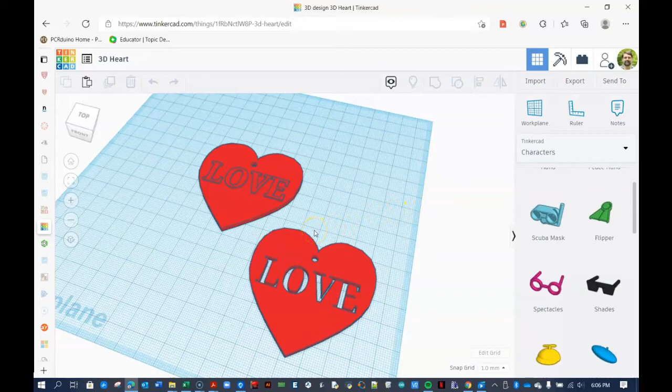While there are other more powerful 3D modeling programs out there, the 3D design features in Tinkercad are so simple and easy to learn that it is a good starting point for many students. Sometimes easier is better than powerful, especially when having a basic prototype in hand is more important than taking the time to learn how to use a more complex CAD program such as Onshape, SketchUp, or SolidWorks.

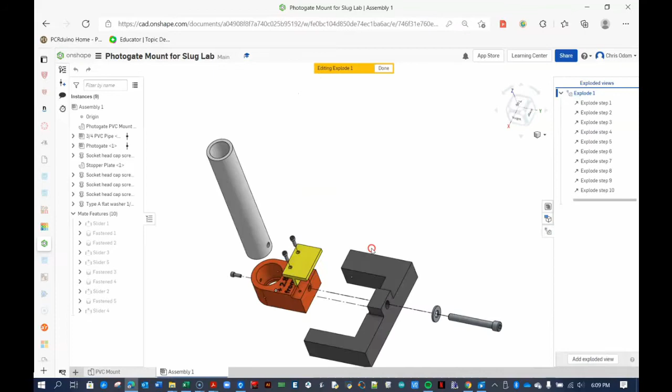Before jumping into how to use Tinkercad, let's take a closer look at exactly what we want to make. For most engineering tasks, you will have a very clear set of design parameters and tolerances. But our artistic ornament allows us more flexibility to be creative here. Nevertheless, it is prudent to have some idea of the dimensions of your design before starting out.

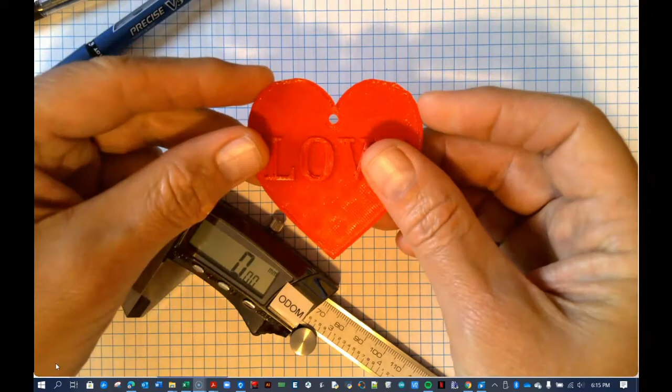Furthermore, let's add a hole that is just the right size for a small screw. In our robotics lab, we often use size 4 screws for our robots, so let's make the hole for this type of screw. Specifically, we use 4-40 screws. The number 4 tells us something about the diameter of the shaft. A number 4 screw, for example, is larger than a 3 and smaller than a 5. And the number 40 tells us that there are 40 threads per inch.

However, because the hot plastic extruded from the 3D printer comes out a little thick, I'll make the hole just a bit larger than the table suggests. From trial and error experience, I know to make the hole 3.66 millimeters. We are now ready to begin to design our ornament. Okay, so let's get going.

The first thing you want to do is create a Tinkercad account if you haven't done so. It's free for educators and for students, so hop on there and create your account. Then when you get to your home page, you'll see a link for 3D designs or circuits or whatever, and you're going to click on 3D designs and create a new design here.

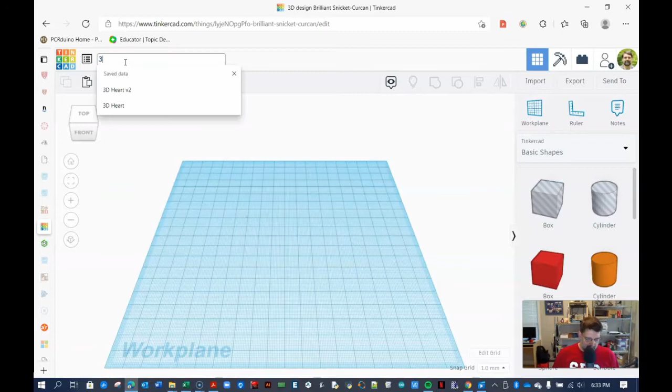It's going to be named something silly like this. We're going to change that name. I'm going to call mine 3D Heart version 2. Okay, and it automatically saves, which is nice, and it saves to the cloud, which is nice, but if you don't have the internet, then you are out of luck. So, pros and cons, right?

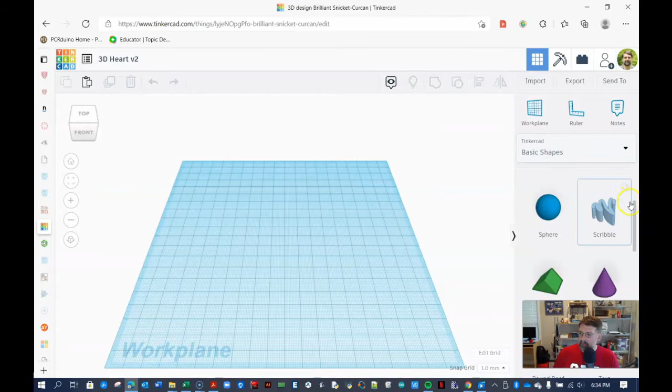So the first thing we want to do is realize that this is our work plane, and we can build anything we want on here. And because we're building a heart, I'm in basic shapes, and I'm scrolling down to the heart, and I'm just going to drag it onto the work plane there.

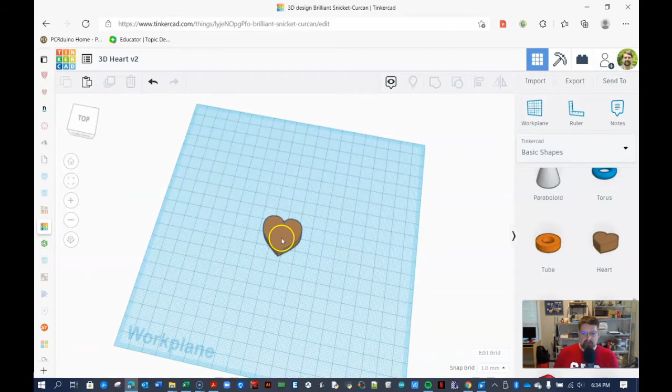Okay, I can reorient my view by turning this little cube. I can also right mouse click and move around like so. And here's a nifty trick. There is no hand tool. So for example, if I move this heart down here and I want to zoom in on it, if I zoom, no matter where I put my mouse, it doesn't have a focused zoom. So it's kind of difficult to get down to there.

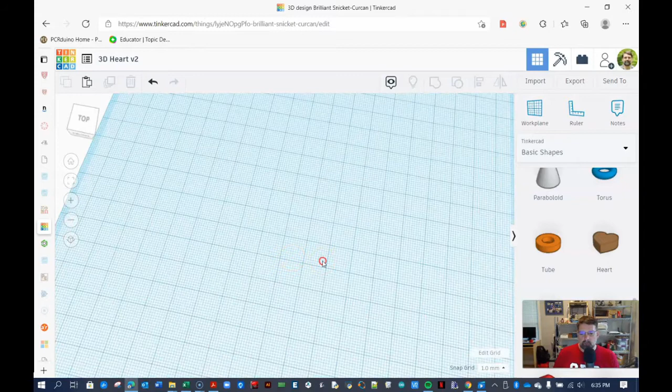But I've discovered that if you use a mouse, and I highly recommend when you use CAD designing that you are using a mouse, if you click on the scroll wheel, you can click and hold it and use it as a hand tool and move it around like so. So this little piece of advice there. And to move it around, I'm just left clicking on the heart and moving it wherever I want. So I can view it from the top. Again, center mouse click to hand it over.

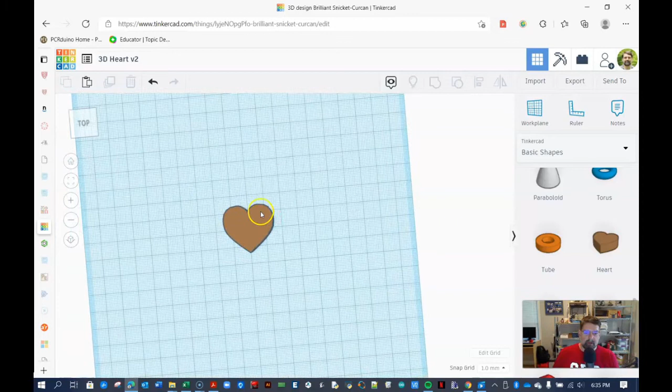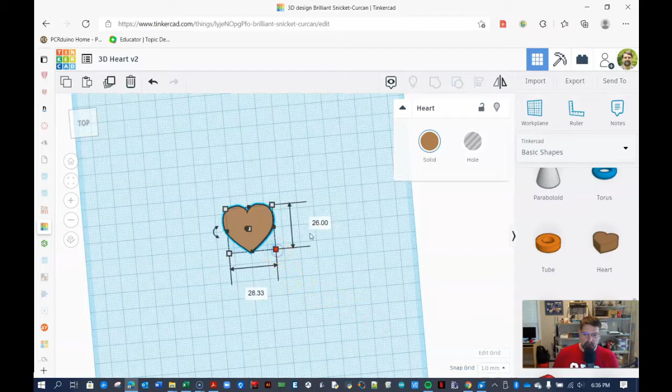And it's kind of hard to tell how big this heart is, but if you click on it and click on one of these corners, it will tell you that in this case it's 26 by 28, and we're in millimeters because down here it tells us that the grid is in units of millimeters. So if you recall, we made measurements of 66 millimeters by, say, 66.

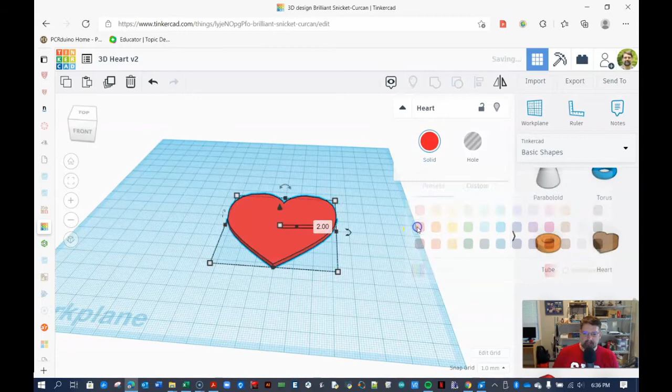Okay, and we also remember that we wanted this to be 2 millimeters tall. And because it's a heart, let's go ahead and change that color. Although with 3D printing and laser cutting, the color is completely unnecessary, but you know, we are artists, aren't we? All right, so there's the basic heart.

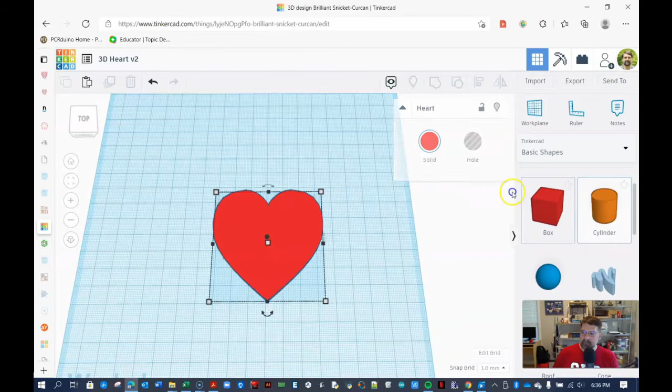What we want to do now is place a hole in that heart, and as you might imagine, that hole can be done with a cylinder. So let's place a cylinder on our workspace. Now, that's a pretty sizable hole, and we can click here and see that it's 20 millimeters by 20 millimeters, so that's 2 centimeters, almost an inch wide, and of course that will be way too big for our 4-40 screw. So let's shrink it down a bit.

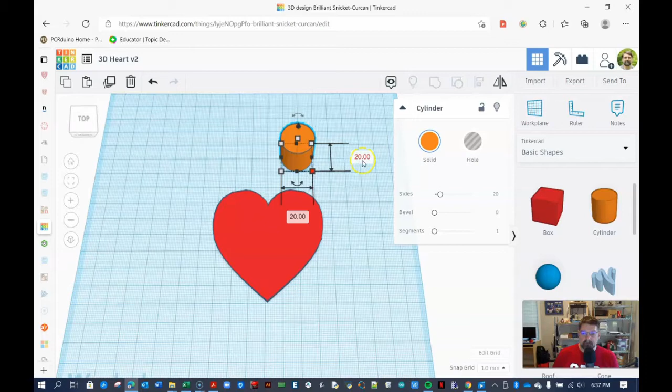If you remember, it was 3.66 for a 4-40 through hole, clear, what's called a free fit, 3.66. Boom, like that. Okay, and I'm going to undo that, and I'm going to show you really what a cylinder is.

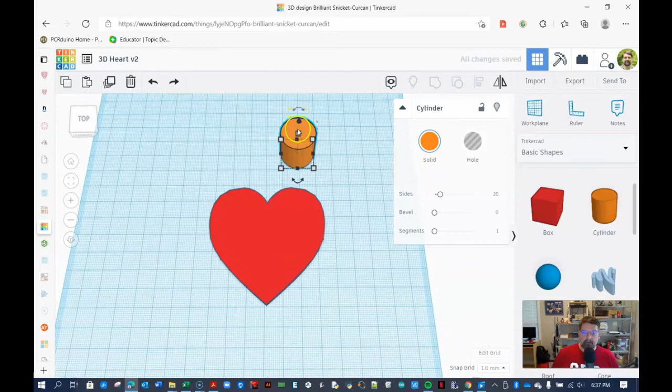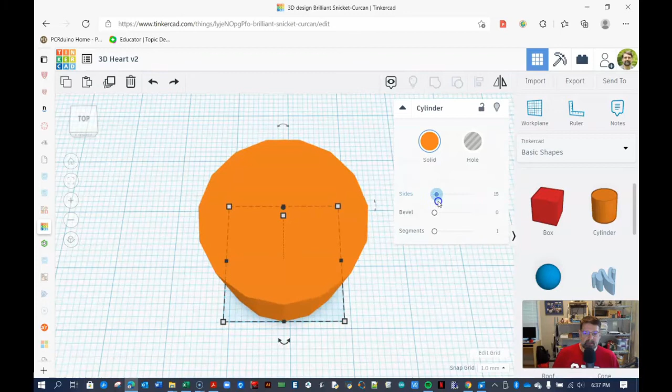Okay, a cylinder. In math class, you learned that it's a circle, right, that's lifted, and this is really a polygon. So in CAD software, all of your shapes are really polygons. In this case, it's a 20-sided polygon, and it mimics that of a circle. If you want it to be more circular, you could just increase the number of sides of the polygon. We can go all the way up to 64, for example, and that's a pretty smooth surface. You have to kind of zoom way in to see that it's not a circle. And for something as small as 3.66 millimeters, it's really not going to make a difference how many sides our cylinder is.

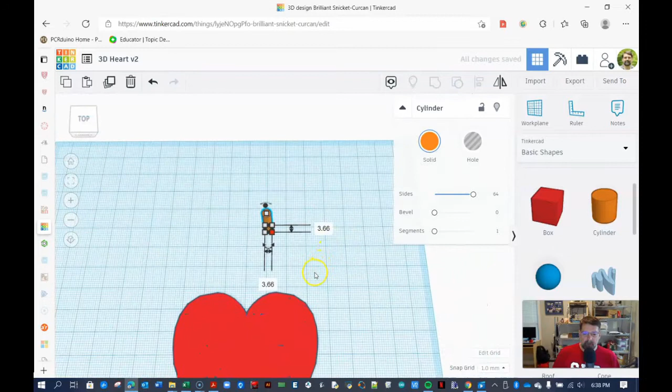But one thing we definitely want to do is make this solid cylinder not be solid, but rather be a hole. So if we make it a hole, then of course it will go through our solid pieces. And if we scroll under, you can see that the hole doesn't go all the way through, so let's just grab this little black raindrop thing and drag it down to make sure our hole actually goes through the top and the bottom.

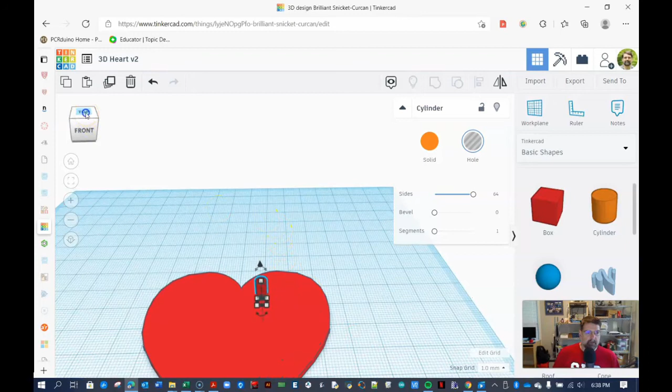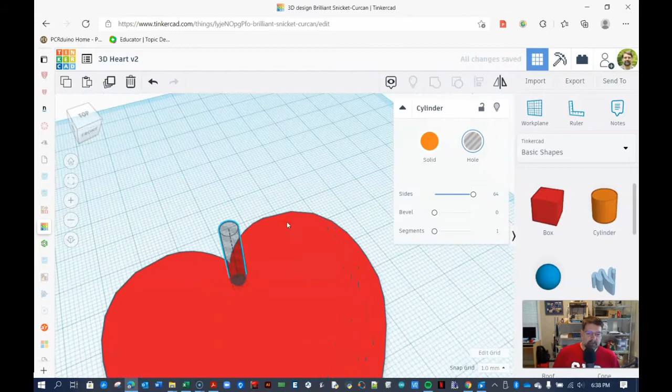Okay, we can click on the top there, take a look at it, and eyeball it if we want to. We could just move this thing around. Oh, what am I doing there? I think I'm stretching it, doing something weird, so I have to move it around. There we go, grab the base of it, and we can move it around and eyeball where we want that to be. We certainly don't want it to be too close to the edge, because then that hole will interfere with the side of our heart. But it's okay if you can't get it exactly in the center.

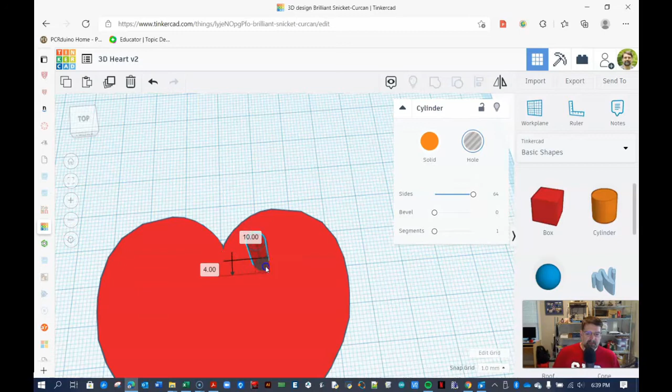Let me show you a little trick. So I got it just at the right distance away from my little apex there, and let me just put it over here to demonstrate what I want to show you. So there's the hole that's obviously not centered. If I highlight the heart and the hole, I can then click on the Align tool, and that gives me some little black dots. If I click on this dot, it will align the center of the hole along this axis of the heart. So, just like that. Now we know that hole is centered, and if we were to hang it, the heart won't hang lopsidedly.

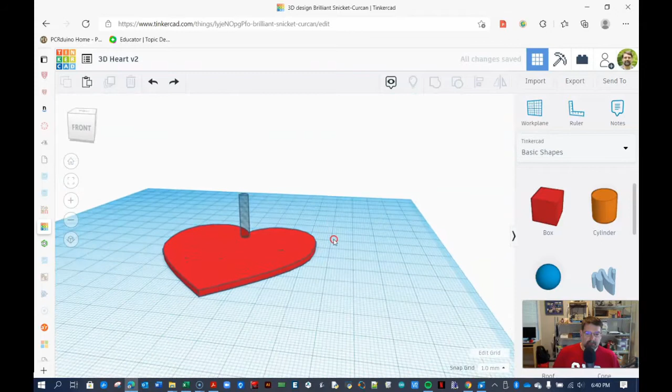And if we wanted to make the hole an actual hole, we would need to highlight both of these pieces and then group them together. And when you group it, then it becomes, oh my goodness, what happened? I must have lifted that hole when I was messing around with it. I surely did, look at that, it doesn't go all the way through anymore. So I'm going to grab the raindrop, drop it down again. Okay, there we go, highlight both, and I'm going to group them. And now there's a hole all the way through the center.

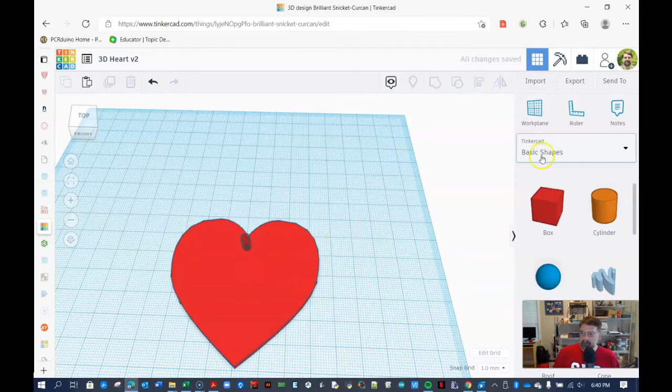Yay. So I'm going to ungroup them, and I'm going to keep working now, and I'm going to add text to the top of the heart. So there's no text tool here. Well, there is right there actually, or you can come here and go to text and numbers. And here, if you click on the text tool, click on it there, and then change the word to love, for example. Notice that there are not a lot of fonts here, there are only 4, in fact.

We're pretty limited here. Again, Tinkercad is a fine tool, but it's not a very powerful one. So I'm going to change the color a little bit, just so we can tell the difference, and now let's go place it on the heart.

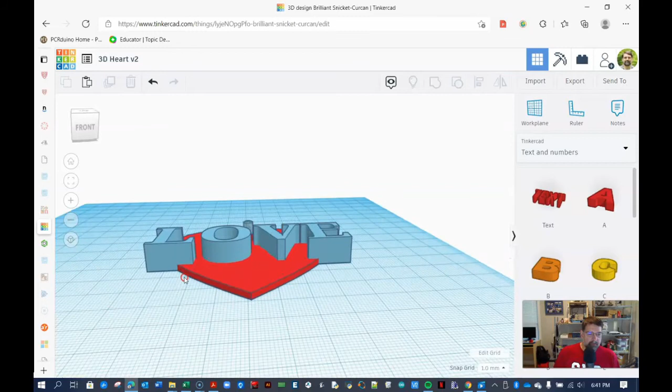And I want to show you this. Notice that the bottom of the word love is actually at the bottom of the heart, and that's not what we really want.

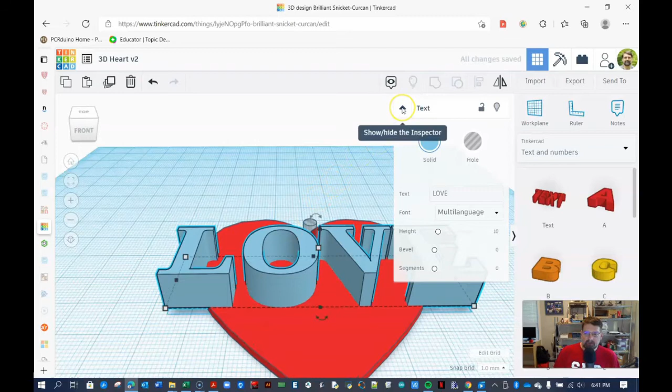We could click on the word love, we could lift it up a couple of millimeters, but when you do things by hand, you're not always 100% sure it's going to actually be on the right surface. So what I'm going to do is delete this and start over.

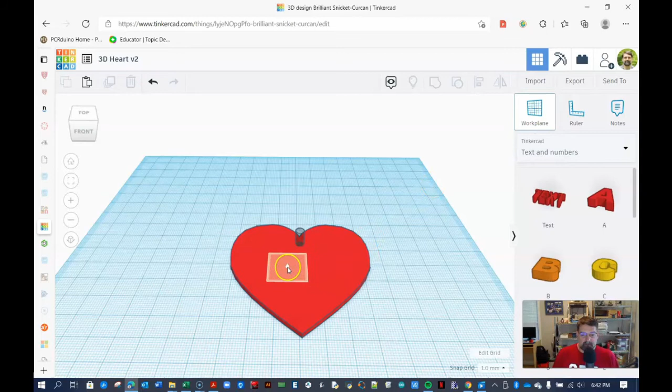The work plane is at the bottom of the heart right there. See that blue work plane? I'm going to choose the work plane tool, or press W, the hotkey for work plane tool, and click on the top of the heart. Now the work plane is at the top of the heart.

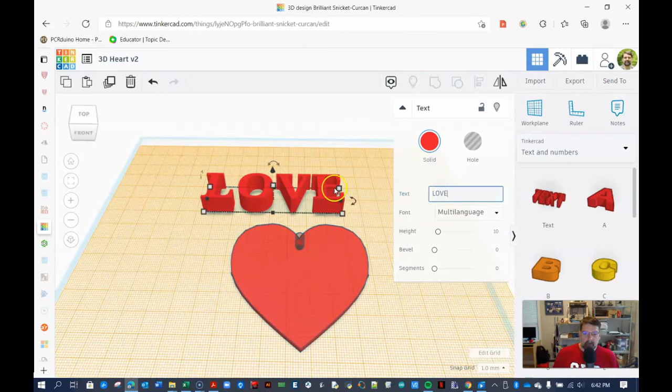So when I go and add my text, now the text is going to be aligned with the top of the heart. I can go back in there and edit it, and I can manually move it over.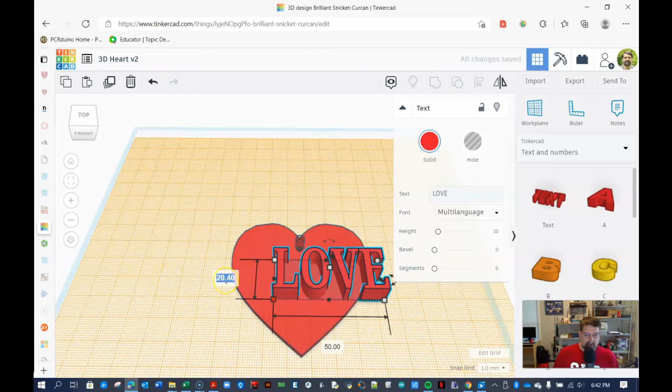Obviously this is too big to fit on there, so I know from experience that 50 is a pretty good dimension for the length, and 15 for the height. Let's see if that fits better. That looks okay. Of course, we can make it whatever size we want and move it wherever we'd like, and we could even rotate it if we wanted.

Okay, and finally, we need this to be 1 millimeter instead of 10 millimeters tall.

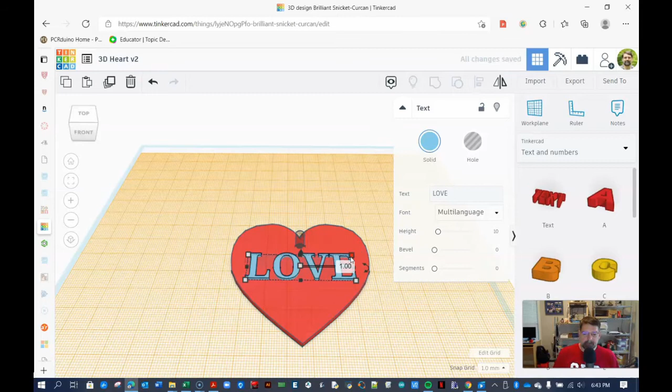Let's align all three of these with the center, and now we know that the word, the heart, and the hole are all aligned with the center of the heart. And then finally, we group it.

Notice we've lost our color there, which is fine. In 3D printing, the colors don't translate to the 3D printer.

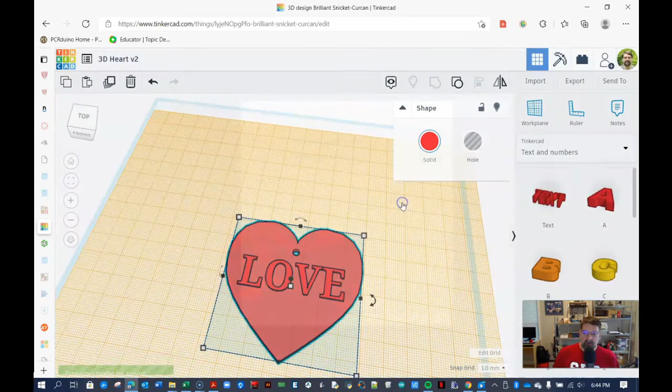And then finally, all we have to do is export it. So let's highlight what we want, and then export to the 3D printer as either an OBJ, STL, or GLB file. My students will use STL, so you do that, it downloads instantly, and then you can go open up that file and put it into your 3D printer. So that's all you need to do for 3D printing.

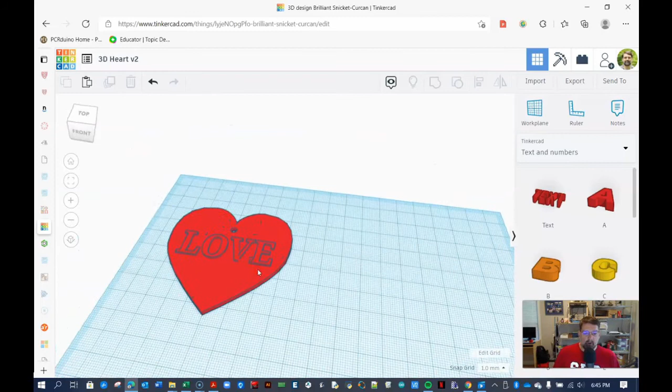Let's do the same thing now for the laser cutter. Before we jump into the laser cutting design, I meant to mention that a 1 millimeter height here in the word love with a low resolution printer is about 3 layers of plastic, so if you wanted more, you could increase that embossing height.

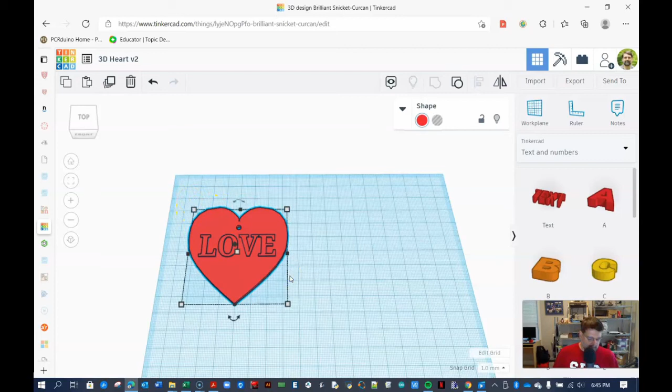All right, so now let's make the same thing, but for a laser cutter. I'm going to copy this with Command C or Control C, and paste it with Command or Control V.

I'm going to leave this one alone, and this is the one I'm going to play with, the pasted one for my laser cutter. This is going to be pretty much the same thing, I'm going to ungroup it there.

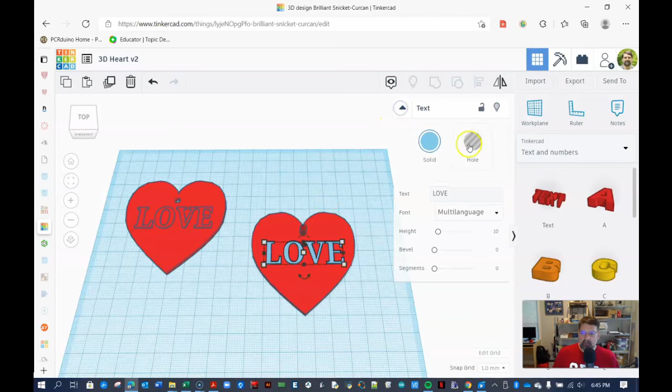The only difference here is that the word love is no longer going to be solid, but rather it's going to be a hole, and I want the height to be, let's make it 20.

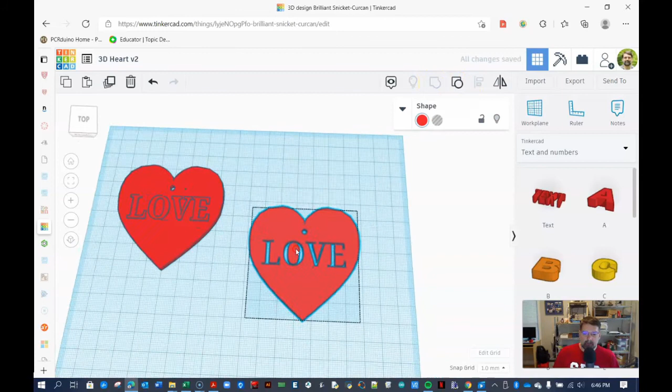And then I'm going to push that down into the heart so that it's on the top and the bottom, just like we did with the hole. Now if I highlight all three and group them, so now we can cut that out.

Again, the text feature is pretty limited. There was no stencil text, if you noticed. So the letter O, when it gets cut out, that center piece of the O is going to fall away, and it's just going to be this big open hole there.

If you wanted something more powerful, or if you wanted a stencil font, you would need to use something more powerful like Onshape or SketchUp, some other kind of CAD. But for most purposes, beginners will probably like Tinkercad just fine, which is why I wanted to introduce it to my students today.

All right, finally, to export this, you highlight it, you go to export. This time I'm only going to choose the selected shape, and for laser cutting it's an SVG file. You click that, grab it, and throw it into your laser cutter like normal.